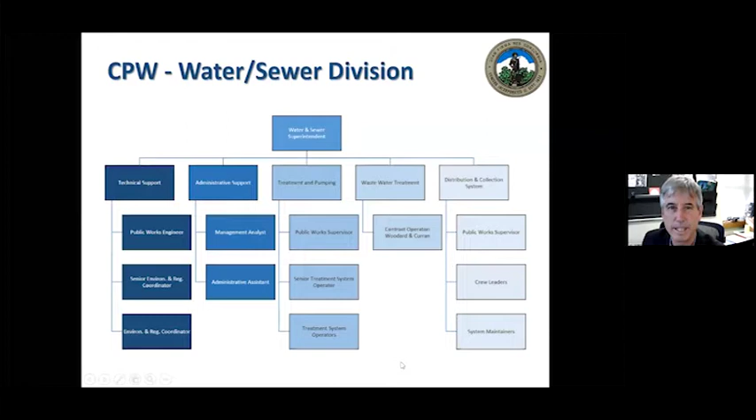I know there's a lot of interest about Nagog Pond, so we will have a section to talk about Nagog Pond. Then I'm going to go into the municipal sewer. Same thing, history, the treatment, the collection system, and then we're going to sort of wrap things up with an integrated water resource management concept. So as I go through these, I'll stop after each if people have questions and we can kind of entertain them. But so you can see that's where we're headed.

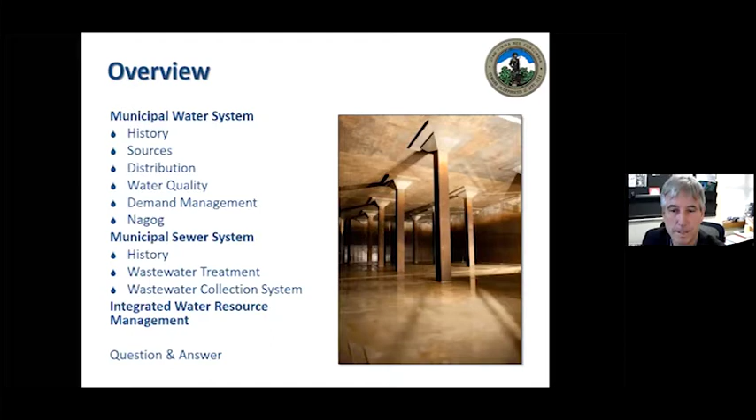This is the inside of the Pine Hill Water Storage Reservoir. It's a beautiful structure. Water infrastructure is pretty magnificent. I'd like to say we have the funds for the Richardsonian type infrastructure and architecture today. We don't, but some of the water infrastructure around the country and world is pretty spectacular. But this is inside one of two storage chambers up on Pine Hill.

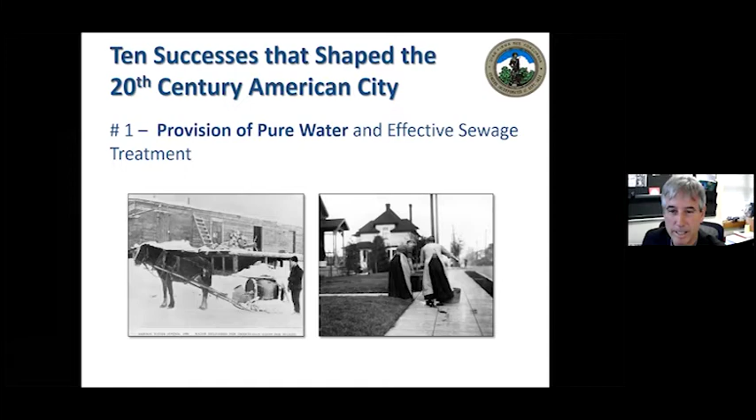When you look back in the early days, this literally is a delivery system for water, and back before there were sources of supply, you had to get it somehow to your individual homes. I just love this image of horse-drawn water supply. And I'm going to come back to this slide later. And then managing the wastewater in any form, getting it out of the house, or having the luxuries of plumbing, is not really appreciated by a lot of the world. And we take it for granted.

But in any event, how did this happen? This is in the beginning. The advent of water supply was to look at gravity. We didn't have power supplies; we couldn't have pumps and that sort of equipment. So you looked at natural resources that would deliver enough water, high quality, under pressure to a community.

I don't know if you know or not, but Concord's first supply we took from Sandy Pond in Lincoln, and there was legislative authority to do that. Why in Lincoln? Because it was at higher elevation. We had a need, and we had a young engineer named William Wheeler, a Concord native, who was a drainage expert. And at the age of 22, William Wheeler proposed a design to bring water from Sandy Pond in Lincoln to the center of town.

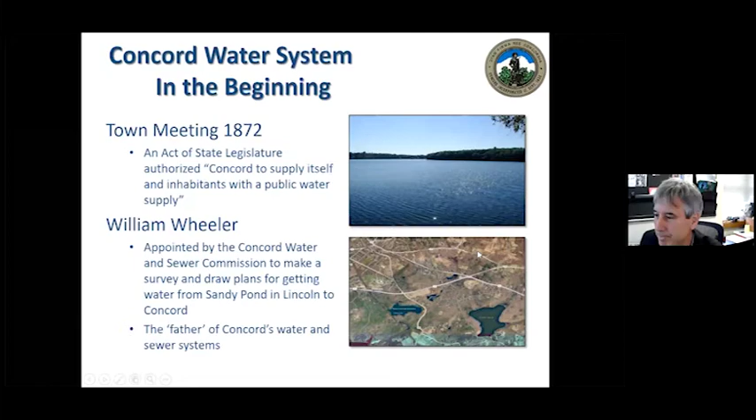You can see here, this is Sandy Pond, this is Route 2 over here, this is Walden Pond over here. So literally taking the water from here into the center of town. It was a gravity water distribution system. This is an image not of Sandy Pond, but one you can imagine would be very similar in its day, building infrastructure, pipes that connected to the surface water, then ran by gravity to the center of town.

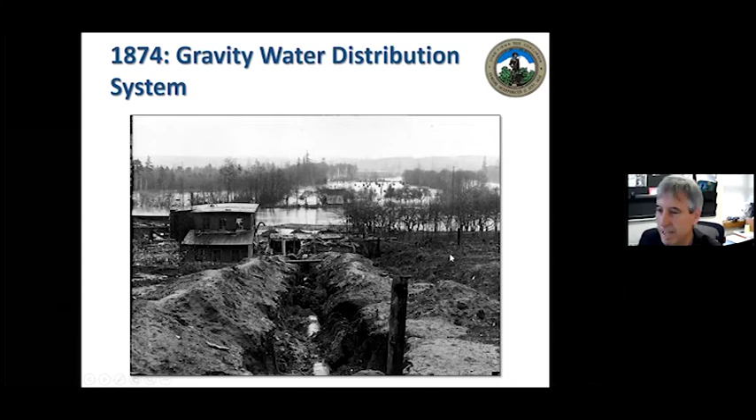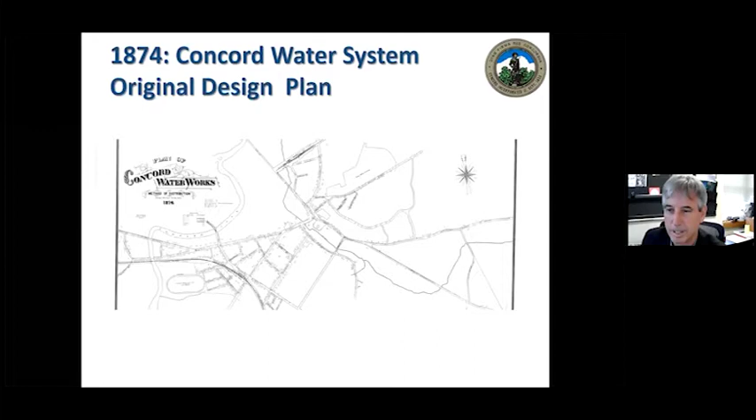This is one of William Wheeler's early maps and plans of the water system in Concord. He not only designed the infrastructure, but he also oversaw the construction. He was a construction administrator. And he did all this work before he was 24 years old. And this is another historic image of a waterworks in Waitsburg, Washington state. It's kind of fascinating.

Concord celebrated December 3rd, 1874. The water system was activated. And there was great to-do about it; it was written up in the records about the water flowing up over the highest building in town, probably the townhouse.

But really, bringing water to the center of town was not just about potable water, it was fire protection as well. That was why water systems were designed the way they are, for both fire protection as well as potable water. Interestingly, over time we've learned some lessons that sometimes they don't necessarily coexist so well as far as size of pipes and pressures and that sort of thing.

So I'm going to go back. We had development over the better part of 50 years where the town expanded, the water distribution and infrastructure expanded, and we went from relying solely on Sandy Pond to getting water rights and activating Nagog Pond. Again, Nagog is outside of Concord, but higher elevation, more water available. So as the town expanded, it was able to get the rights for Nagog Pond, and we're going to talk about that a little bit.

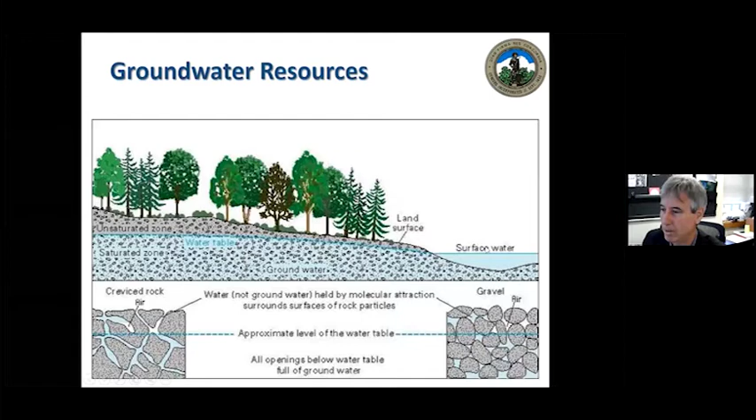Both can yield water. In the 50s, there wasn't a lot of technology that could drill through the bedrock and draw from bedrock. But today, if someone were putting a private well in, they'd likely draw from bedrock. The town has somewhere between 30 to 80 feet of saturated groundwater, what we call the overburden or glacial outwash, sands and gravels, that can yield anywhere between 500,000 gallons a day in certain areas to up to 1 million, depending on its supply. So the question becomes, with a power supply, how do you extract it?

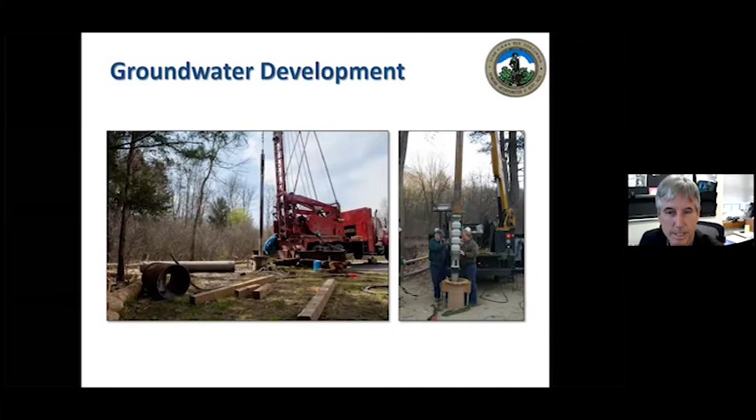So this today represents all of the sources of supply that we have. Now it's interesting, large urban environments may have a couple sources, Wachusett Reservoir and Quabbin Reservoir, for instance, for Boston. For Concord, we have 6 different groundwater supplies. We have 1 surface water supply. We're a small system, but we're cobbled together with different sources in different areas. And each one of those combined allows us to provide reliable supply year round.

When we lose a source for a mechanical problem or there's a water quality issue, it has an impact. We literally design our system around multiple sources of supply and how we manage them. So over the past 50, 70 years, we've developed this network. I'll take a pause and ask if anybody has any questions at this point on the history of the town's sources of supply. Any questions? Anybody want to offer anything at this point?

People will have to put them in the chat box, Alan, because everybody's muted. Okay. So, Alan, continue. I have a quick question. Please.

How many gallons of water does Concord need per day in order to serve our community? I'm going to give you a quick answer. It ranges between 1.5 million and 4 million. And I have a slide that's going to get into that later on demand management.

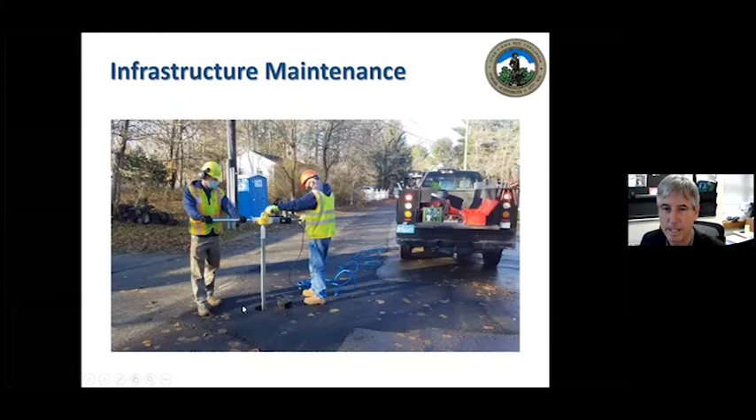That infrastructure comes with expenses to maintain. We have operators. You can see here's a picture of operators using, this is sort of a neat little gadget, an electronic operator that turns valves in the ground. Water distribution is a lot like your home plumbing, but on a much bigger scale. So when you need water, you open and close valves, your sink, and water flows. Well, if we need to manage the water distribution system, if there's a break and we need to isolate so we can do a repair, we have large valves that are out there. So we need to exercise them and make sure they can be operable when necessary.

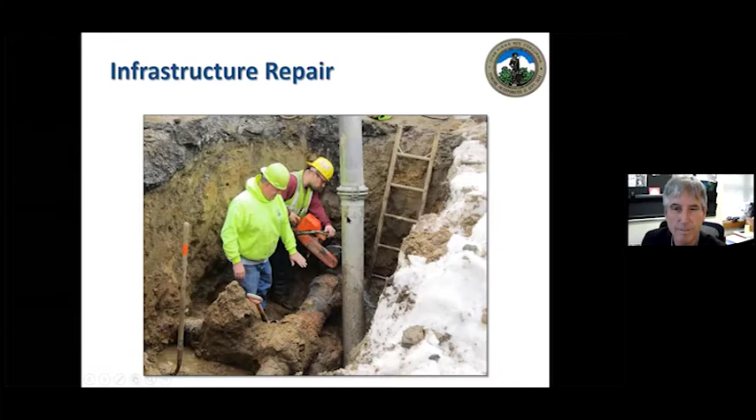Sometimes we have problems, and you'll see, unlike your plumbing, it's a little more difficult to get access to it. So anytime there's an upset, it's a pretty significant undertaking to get access to the infrastructure: heavy equipment, operators, specialized equipment. You can see the pipes are generally buried somewhere in the 5 to 6 foot range. The reason for that is frost, and so we like to get these pipes below the frost line. You can see the scale. This is probably an 8 or 12 inch pipe, maybe a 12 inch, with a valve. So we may do repairs on the pipe, and sometimes, if it's really necessary, we may actually replace. And this shows sort of a spot replacement of what we call a valve assembly. This allows us to control flow in multiple directions when and if we ever need to.

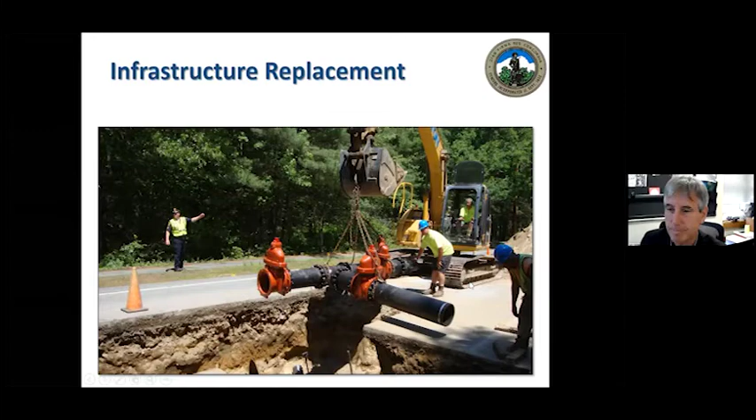We schedule, and you'll see in our capital plans often in the water fund, a scheduled area where we'll do replacement in a neighborhood. And that's where we go back to that image of some of the older pipe or pipe that is failing. And we will replace generally somewhere between a half mile of pipe and a mile of pipe a year. It's historically been about a half mile.

We have been doing work over the Peter Spring Road area this year. We did some work on Potter Street this year as well, but we're looking at somewhere around $1 million to $2 million of investment to do that work. Our budget right now is about $600,000 on average. It's probably not enough, but it's more than a lot of systems invest.

And we keep our eye on that, and we're looking at technologies to evaluate the need for replacement, as well as looking at replacement alternatives to completely excavating. When you dig a trench, you have a significant impact. And if you go into any of the neighborhoods, we tell you this is construction. And there's a saying, you've got to break a few eggs to make an omelet. That's what we're about.

We have to go in, we have heavy equipment, we have traffic impacts. There's a hassle factor to it, but it's necessary because we need to replace this infrastructure. And we typically dovetail this with working with the light plant, making sure we know what their plans are, working with the engineering division in Public Works, making sure we know what the roads program looks like so that we can get in before they may have a reclaim project or something like that. So we try to do it as efficiently as possible, but it is a significant undertaking with a significant cost.

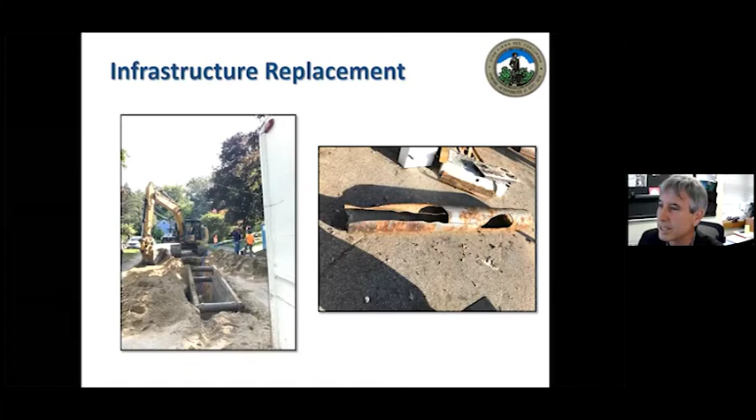I'm going to transition into water quality. Does anybody have questions on the distribution system at this point? Yes, I think Carlin in the chat box. Carlin, can you share some of the questions that you're hearing? Sure, Alan, it's been a very thought-provoking piece already. I have 4 questions for you. Do you want me to give you one question at a time or all 4 at once? I have a bad memory. One at a time is great. Okay. One question that we had was, when will the Brewster well be developed?

Okay. Brewster well is a well that we secured, very fortuitous, early 2000s. There was agricultural land that was going to go on the market. And I can't recall how many acres, might have been over 20 acres, or maybe 16, up off of Balls Hill Road. So up at Monument Street, Balls Hill Road. Actually, I'm going to go back to that slide just so you can see what we're talking about. It is kind of helpful. Here it is. And you see Brewster well.

We were able to secure the land using water funds in a special town meeting with unanimous support to identify this as, if we ever need it, we're going to develop. We talked about there's only a finite amount of water we can extract from the ground. And most of our supplies are down in the southern section of town, because the geology is different in the northern section of town. But there are some sands and gravels up here we're able to identify. And we put it on hold to protect it. It's presently under protection. In fact, our initiative helped with this Autumn Farm; the conservation land around it now dovetails nicely with our open space.

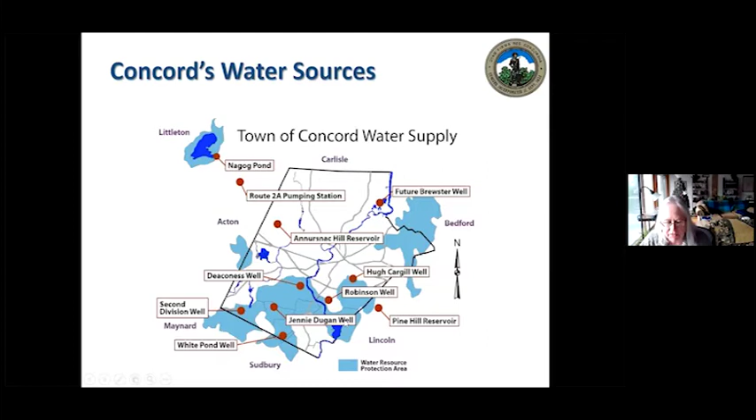Second question I have is, on that same slide, does the Annursnac Hill Reservoir water come from Nagog Pond? This is a question from Janet.

Okay, so I'm going to point out Annursnac, this is the reservoir. These are where water fills. They're not a source of water, but they get water from our wells and Nagog. And also we have Pine Hill. That's a reservoir as well. So I'm now going to go to the following.

See this network? This is the pipe distribution system. It is all interconnected, much like your veins are interconnected. And you have one heart that's pumping, but it's pumping blood throughout the entire body. We have a number of hearts. Each well represents a different source of pumps and pulsing, but those contribute and mix and blend into

this distribution system. So for general sense, you can see the closer you are to one of these sources where you live, when it's in operation, your percentage of water from that source is probably more than someone who lives in a different section of town. The waters blend regularly and wells come on and off, and there's a blend.

So Nagog, historically when Nagog was the sole source of supply in the 50s, actually there was Sandy Pond and Nagog. Everything is fed by Sandy Pond and Nagog. We used to pump over 2 million gallons a day from Nagog, and that fed most of the town's supply during the 40s, 50s, 60s, 70s. And then we started introducing groundwater and blending it. But the long answer to that question is it's a blended supply.

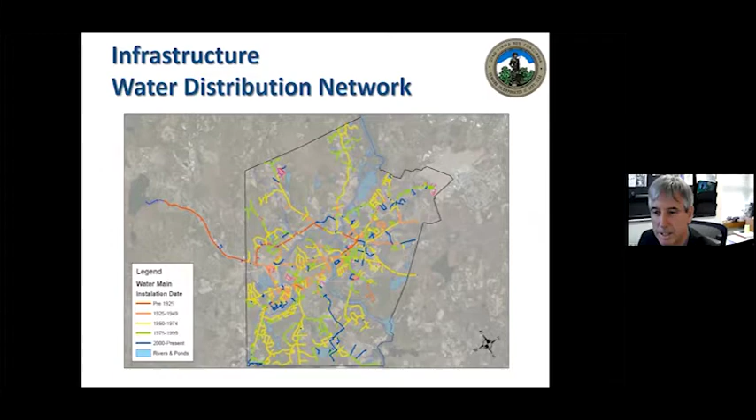That's it. And the sewer? Thank you, Alan. This is amazing. And the sewer system, please? All right, I'm going to get to the sewer system and I'll answer that question when I get to the sewer system. Okay. So I'll continue with the water.

Go right down. Quality. So quality, one of the challenges with quality, or there's a couple. Most people are most concerned, historically, with visual, taste, odor issues. Those are the aesthetics that really were a metric back when water supplies were first developed. How does it taste? How clear is it? How cloudy is it? Is there iron or any minerals in it? Things that could be displeasing.

Early on, we realized that without disinfection, there was a lot of disease and outbreaks, dysentery and cholera and that sort of thing. So a lot of systems early in their development started with disinfection and different types of disinfection, but that's a biological challenge. Most people don't see that, but that was an advent of public health. We also are learning more about chemical contaminants as well. So basically, the purpose for treatment is one or all of the above. And systems are evolving to try and keep up with the information as well as technology.

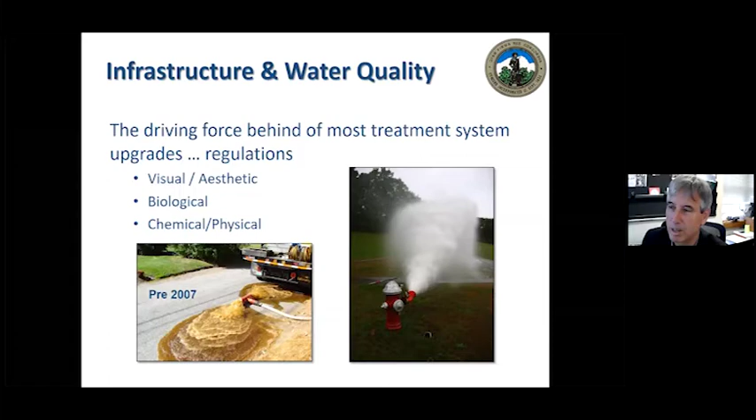We do a lot of testing to ensure quality control of our supply. As I mentioned, each of our sources has different chemistry and quality. What we do is a combination of bacteria testing, and we test for chlorine because there's a certain amount of chlorine, that's our disinfection. We use sodium hypochlorite right now and ozone. And we want to make sure there's a residual in the water to protect against regrowth of bacteria.

When I said sometimes the fire protection challenges don't marry well with the drinking water challenges, large pipes have large residence time, or time where water is standing. If you have a camp on a well, when you get there, you probably don't take a drink of water as soon as you walk in. You probably run the water and flush it, knowing the water's been sitting for a while. With 12-inch diameter pipes, if the water isn't being used, it can get stagnant. So the disinfection needs to allow us to ensure there is no regrowth of bacteria. That's why we monitor things like chlorine, which are additives.

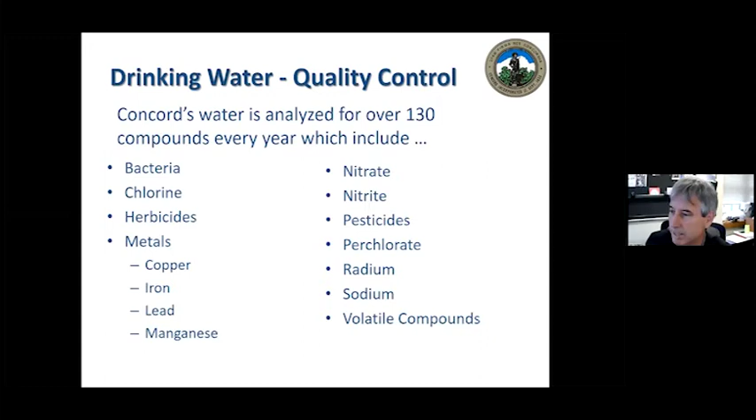But as Alex can attest to, if you have specific questions, we do regular monitoring of over 130 compounds. Many are driven by regulatory requirements, based on experience and lessons, through EPA and DEP. We get into a universe of what we call emerging contaminants. And this is a big challenge to a lot of systems because it's the next frontier of contaminants.

These aren't things that necessarily impose a taste, odor, smell, but they can be at levels where we've gone from parts per million of detection, which we used to think was remarkable, to a part per billion. We thought that was remarkable. At a part per billion, we're measuring it, monitoring it, and care about it. We're now into a universe of compounds that we care about at the parts per trillion level.

We're developing, it's kind of like taking a telescope. It's like looking up into the sky and saying, what can you see with your naked eye? That's what we cared about earlier on. Then we got a telescope. Now we start seeing more and we go, oh, we should be aware of these particular chemicals in our water. And now we're getting Hubble spacecrafts that are giving us the universe. It's that kind of level. The order of magnitude of these risks and concerns continues to challenge the industry to stay on top of the measuring as well as treatment.

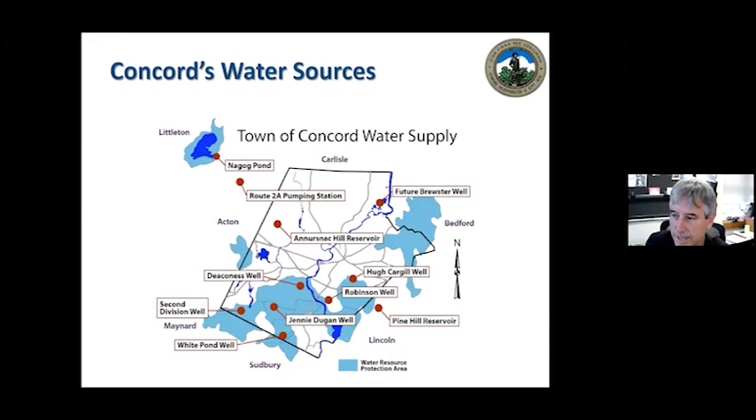And as I go back to this slide, all of these sources are a little bit different. They're impacted by natural conditions as well as land uses around them, and the land uses include commercial as well as residential impacts. That relates a little bit to some of the wastewater questions we have. The conditioning at all of our supplies, because they blend, they have to marry each other. You can't have one source reacting with a different source and making an impact to a neighborhood. So we blend, and we have to condition them so they can blend cooperatively, for lack of a better word, without a negative outcome.

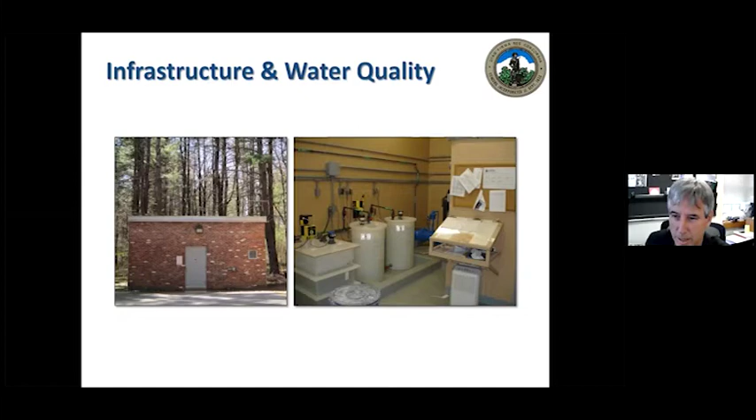And so this is one of our pumping stations, a small brick kind of building. It's got a well located inside it, and people want to know what's inside these things. Well, these are just basic batching processes of what we call conditioning chemicals. We had pH adjusters. We had sequestrants to bind iron or manganese so it doesn't come out in the distribution of your service line. We fluoridate the water, and that's been controversial in the past, and we've had town meetings about fluoridation. But we've been doing this since the 70s, and we disinfect as well. That's the baseline treatment at all of our supplies.

Every time we talk about the next generation of treatment, you start increasing the complexity of the treatment processes. You increase the complexity, you increase the costs, and you increase the need for operators who are able to manage and maintain and support that infrastructure. Our water division continues to evolve and get the expertise and staffing on board to manage the systems for today's needs, which are very different than they were just 30 years ago when I was getting into this business.

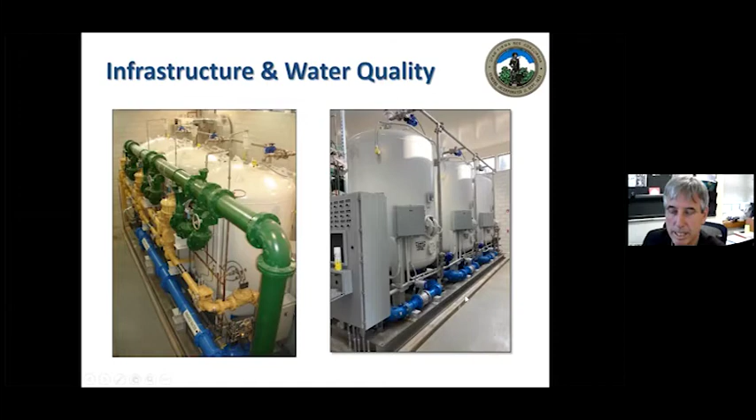The complexities are remarkable, and the technology expands to, you may have heard me use this term, SCADA. It's supervisory control and data acquisition. It's used in a lot of industries to automate processes. In the old days, you had an operator turning a valve or adjusting a pump. Now you have computers that do a lot of this in an automated way. They monitor more parameters. The monitoring requires sophisticated instrumentation that needs to be managed and maintained. And they control the equipment and operate valves and backwashing systems and all sorts of things that are integrated into a logic controller.

And then you have operators with technology that can remotely get informed of changes of condition. So even though the systems are sophisticated, we are challenged with having a few operators that literally have to prioritize where they are at any one minute to do routine operation and maintenance or respond to a trouble call. And the trouble call can be 24/7. But they have technology, literally smartphones, where they can bring up information and know in real time what's happening at various facilities. So that's on the water quality and treatment processes.

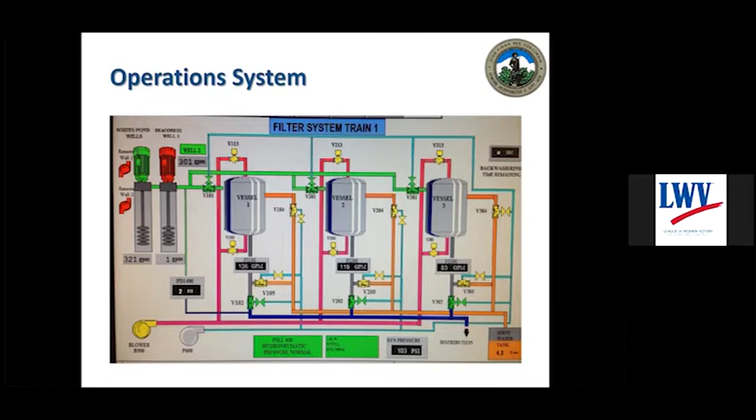Julie asks, about 10 years ago, the pH at her house turned from 7 to 8. She knows because she had a fish tank. Why would it have changed so suddenly? This is an area on Hillside Ave. Actually, it's Peggy, not Julie. I'm logged in as her. So my apologies, it's Peggy.

I should have known by Hillside Ave. So Carlin, on these water quality questions, I'm going to let Alexandra Wallstrom answer them because she knows better than I. And I also want you to have a chance to hear from Alex directly, because if you have a question, even after this, on water quality or treatment, you'd probably be talking to Alex anyway. So Alex, you want to step forward and respond?

Yes, so we do adjust the pH at all of our facilities to make it less corrosive to internal plumbing. And that's something that we are constantly monitoring. So there may have been some short period of time where there was a spike in the adjustment, which our operators would have been notified of through that SCADA system that Alan was referring to. They would have gotten an alarm that things weren't matching up with what our regular treatment pH dose is expected to be, because we're typically looking for a 7.3 out there in the system.

So there are some things with internal plumbing, you may have had something going on in there, but we would have known if there was something going on in the system. We would have made any corrections to any pH or alterations. So I'm imagining it was a short period of time, and all of our wells and supplies are alarmed and programmed so that if one of these water quality parameters was way outside of what we expect, it automatically shuts down the station so that we're not providing water that doesn't meet our specifications into the distribution system. So it's not going to customers' homes or businesses.

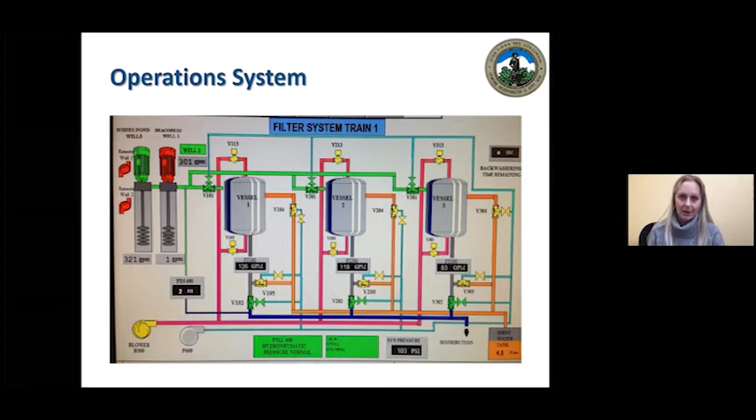Okay, that sounds good. I've got two last questions, and I'm going to put those two together. Can you describe the Annursnac Hill reconstruction project, and what is or will be the impact of the pandemic on the water and sewer budgets? Who wants that? I'll speak to the Annursnac.

So basically, Annursnac was, through our capital planning, original concept was a potential replacement of that reservoir. It's a 2.5 million gallon reservoir, it's a concrete basin with an aluminum geodome on top, kind of a fascinating structure. The cover is intended to protect it from critters and contaminants.

The assessment and budget impact had us readjust the scope, so it became a rehabilitation, not a replacement. And the rehabilitation consists of just replacing the floor and liner of that concrete structure itself. And that is planned to be done. We had hoped to do it in the fall. It looks like it's going to be more of a winter project.

It is out to bid. We don't have the bids back, but we're hoping to have that completed by spring. That's our target. And most of the work is going to be inside the existing structure. So that's the Annursnac.

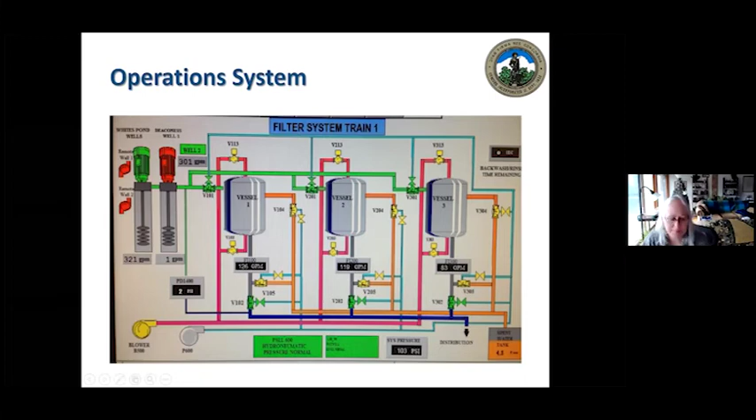Got it, thanks. Back to you, Diane. Thank you, Alan. This is fascinating. Okay, next stage, here we go. Okay, I'm gonna go through this a little. I see the clock, we're moving time at what said 10:30.

Okay, I'm gonna try and move quickly through the demand management. Important, the question came up, what does our peak demand look like and when? You can see this slide shows a couple things. Our average day demand, this is for all residents and commercial customers, all of our customers, about 2 million gallons a day. During the winter, as I said, it drops down to about 1.6 million gallons a day.

The average summer, you can see, is a little higher: 2.44 million, almost 2.5 million. And that's average over the entire summer, May to September. The peak day, we typically see peak days of over 3.5 million, and it varies. But our real concern is not just a peak day, but the 3-4 days in a row of high demand.

We can't sustain that. These lines on this table show the 2.1 is a limit. It's a regulatory limit. We shouldn't be averaging more than 2.1 million gallons a day over a year. So that's a regulatory constraint. With the summer pumping capacity, you can see if we are down a station, and it's not unusual to have a facility down for service or maintenance, these things are running 24/7, 3 million is about where we're at. And this is inclusive of Nagog Pond operating.

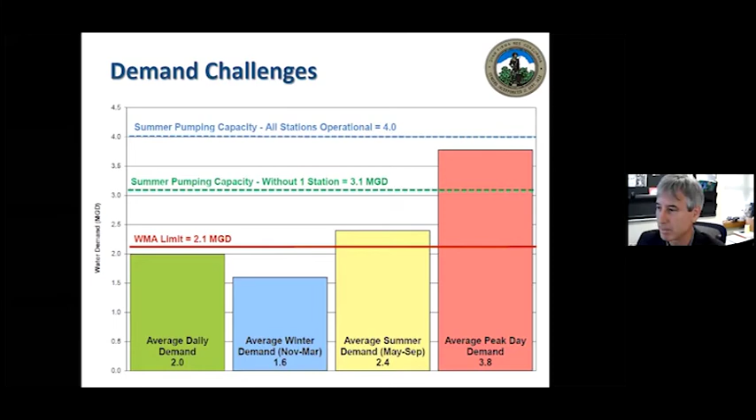Demand is driven by, here's a profile. You can see the commercial institutional uses. We have the hospital and regional supply, Emerson and MCI. Residential is 61%, it's the community. It kind of makes sense. We're starting to look at regulations that focus on residential customers and what their average day demand is. That's a metric we care about when we're talking about conservation.

The state has a standard of 65 gallons per day per capita. Looking at some surrounding communities, you can see Concord's around 65 or 66. Historically, this would not have been a problem. It's just, okay, we know we're close. Moving forward, this may be an issue. This may be a regulatory stick Concord's hit with if we can't bring that down.

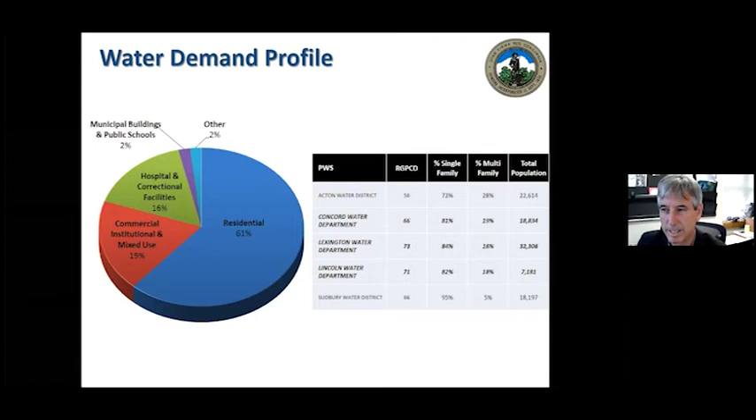It's not unusual. If you look at Lexington, Lincoln, those are communities like Concord, the same kind of profile. Places like Acton, Sudbury are similar, but if you go into an urban environment, they're using a lot less water. The reason is our demands are driven not just by indoor residential use, but outdoor. That's the nature of the type of community we are.

When I first arrived in Concord in '96, Bill Edgerton, the former director, came on board. He's a finance guy, and he looked at our rate structure and said we don't have a disincentive to using a lot of water. We did an analysis of what a typical residential user needs for indoor purposes, what allowance we can provide for some outdoor, and where outdoor is driving the demand significantly. We came up with a tiered increasing block rate structure. The more water you use over certain thresholds, the more you pay per gallon, a fairly significant increase of 100% and 150% of the base use.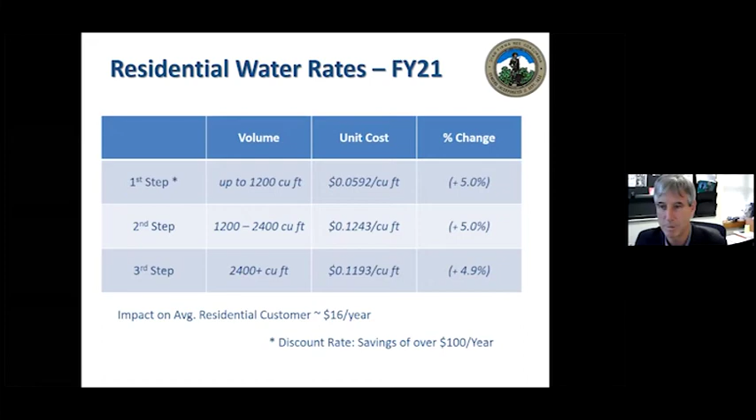That was successful in curtailing some demand, and that was the intent. We want to make sure people have base level service, but if it's a premium, they're going to pay for it. You can see this trend in the average day demands, this red line from '93 up to 2002. Then we started seeing the impact of this conservation block rate system, a noticeable change in people's use.

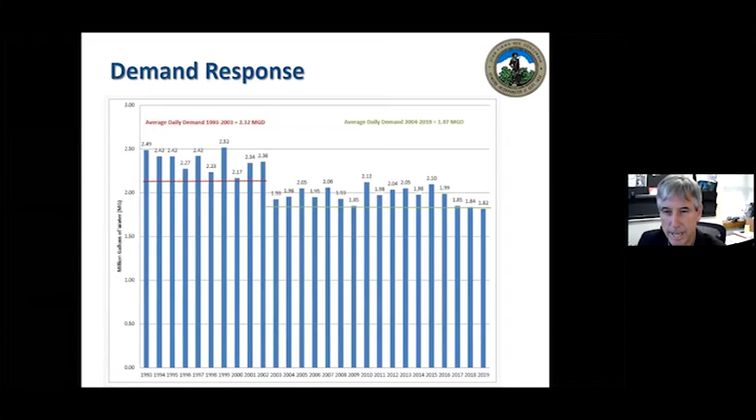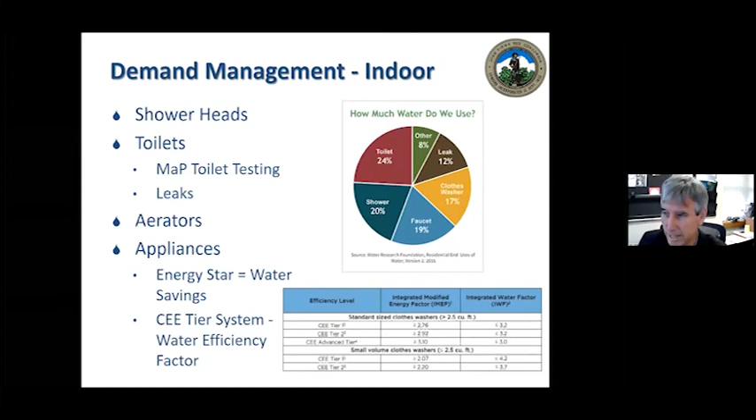So that economic disincentive worked, and it's the responsible thing to do because our infrastructure is expensive to maintain and create. But there's also a certain challenge to do much better. Over the years, we've focused on assisting people with their essential indoor use, where they can save money and how. We have local programs, and there are state and federal programs as well. Alex has been very involved in working with customers to promote these. The big challenge we have is the outdoor.

And we've historically heard this, but I think the real issue is going to be, we're almost at the point where it's no longer going to be a polite, excuse us, can you curtail your use? I think it's going to start ratcheting up a little bit, because we are going to have regulatory consequences if we don't get control of our outdoor use.

Typically, someone with an in-ground irrigation system will use 4 to 10 times more water than someone without. That's significant. And if you look at the balance and sustainability practices and that sort of thing, this is not sustainable. Now, there are ways to have outdoor use and be a little bit more sustainable. And we're working with people in Concord on certain programs. You can see Xeriscape initiatives.

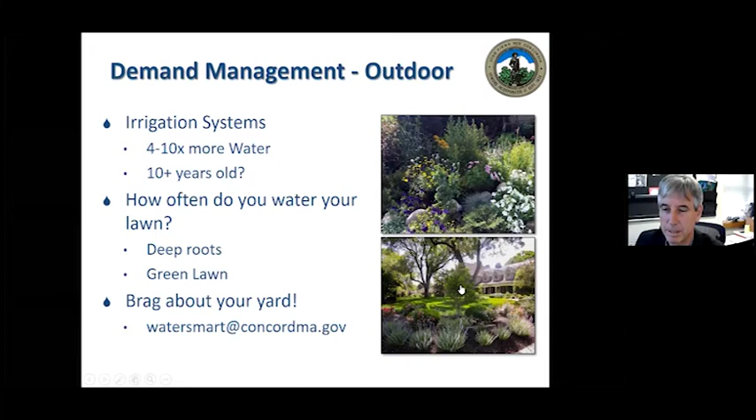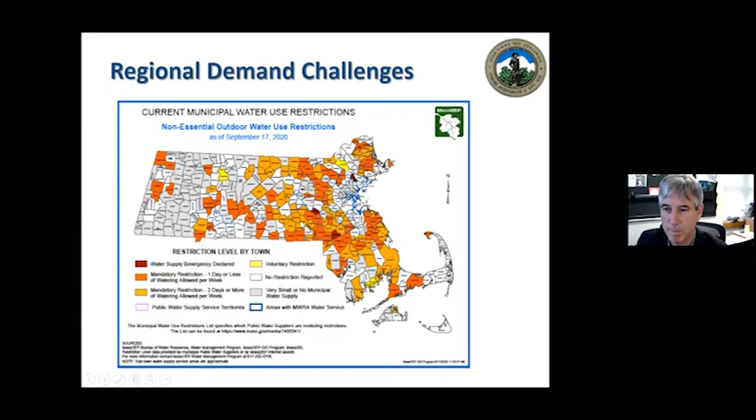This is a map of Massachusetts showing, today, September, water restrictions across the state. We're not alone. There's a lot of impact and interest in trying to curtail water use across the state. Some of these might be driven by supply problems. Some may be driven by regulatory needs. The regulatory drivers are the Water Management Act. That's an act that is administered through DEP, Department of Environmental Protection.

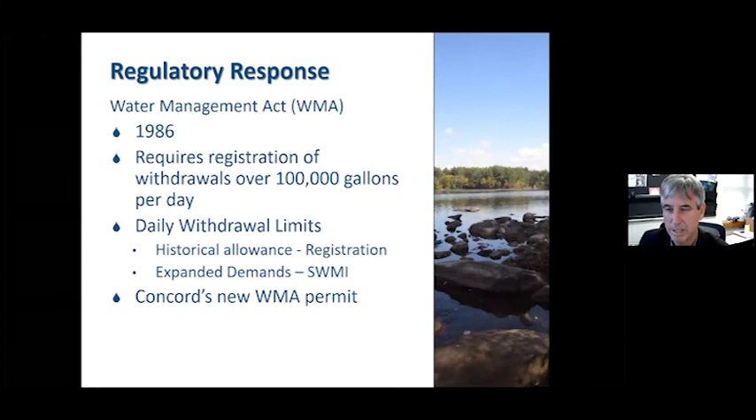It allows them to put controls on systems to try and enhance and encourage conservation. And the reason they do that is because it's sustainable, and there's other externality impacts when you're over pumping or drawing from any one source. And we appreciate there could be environmental impacts. And that is where the permit that Concord may be issued very soon may put some teeth into it, especially on our outdoor watering initiatives.

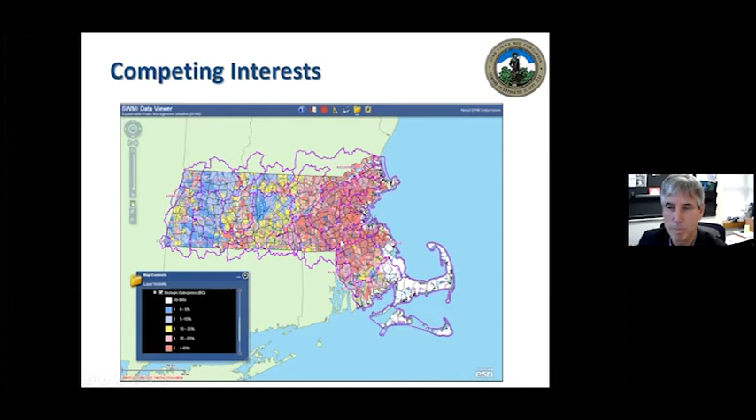The competing interests, there's been a lot of modeling and studies done. There's tools online that we can access that look at environmental impacts on biology, on fish and flow, and that sort of thing, in rivers and stream conditions that are really informing how we are being monitored and regulated moving forward. And there are triggers that may not be. In the past, we used to think a trigger was, we're having mechanical problems, we can't meet demand. We need to slow down because we can't maintain.

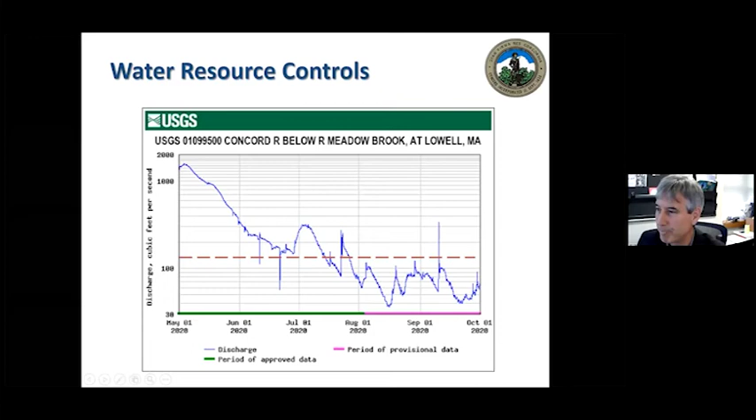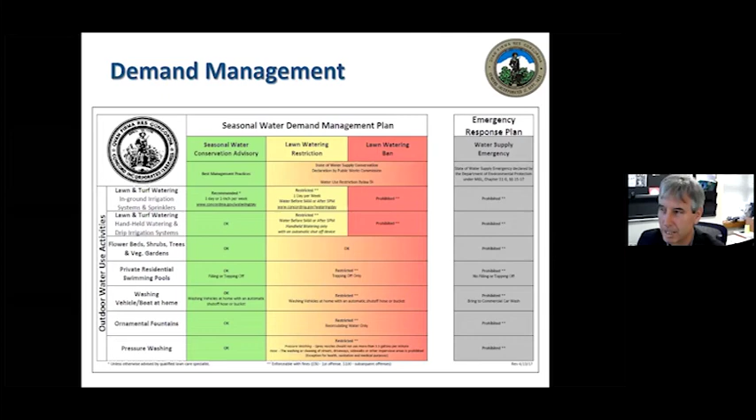Restriction would be 1 day a week. Ban would be no outdoor use. And then there's an emergency, which could be more catastrophic. We hope we never get to that point, but that could happen. We plan the 1 day a week. To simplify it, it translates directly to the trash recycle pickup schedule.

We've sort of borrowed this from some other communities, and have found this is an effective way of at least letting people know when they can water if it is restricted. And basically that takes care of the demand management. In the interest of time, I don't know if people have questions. I would urge you to go to the website. We have lots of good information on that, but I'll entertain a question or two if people want.

Okay, here's a good one. Diane, if I may, this is about the private wells. This has been a hot topic. The question from Peggy is, do private wells used for watering lawns, and I'll add in for private pools, affect the town well capacity? Private wells.

They are not so much an effect on the town wells. Only in the exception of, I will give you an example, Concord Country Club has a private well. That is something we're presently managing and actually working with them on a permit, so they don't have an adverse impact on us. That's a large yielding private well. But most people with a residential well, their yields are somewhere about 5 gallons a minute, 10 gallons a minute. They don't have a significant impact.